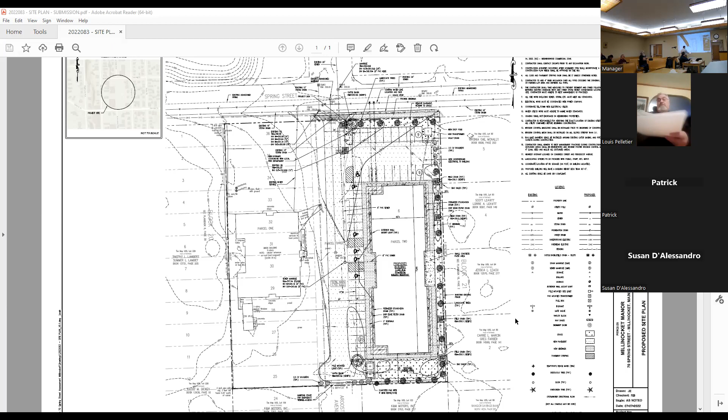We've located the dumpsters in the bottom here, as well as garden space for tenants to be able to grow their own vegetables or flowers. And then there's this additional green space here that we may carve out from the brick building, so that it's more of a lawn space for both properties.

So I think that's the extent of my quick overview of the project, but I know many of you have seen this the second or third time, so I don't want to belabor the point, and I'm happy to answer questions or hear from the public.

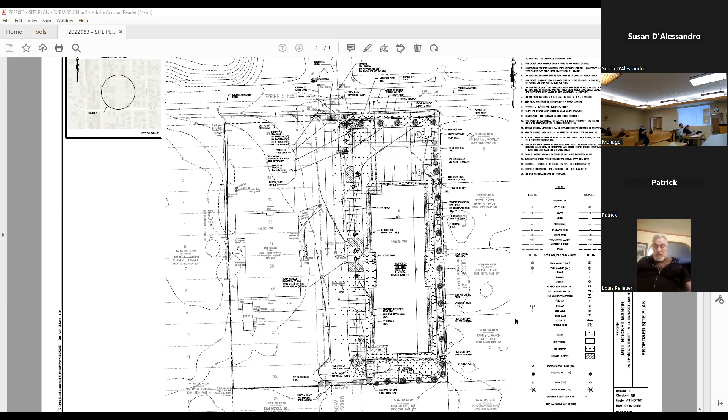Point of clarification: we have an alternate present. If there wasn't a full 7 members, he would continue, since Michelle is here. Mike is present and will not be voting. So we already voted on something. She wasn't here when we did that. Okay, George. Point of order. He can't vote, but he can still have impact and comments. Thank you, I don't want to keep going back and forth on this. Alternate members are expected to attend meetings even though they aren't able to vote necessarily unless there's an absence. Because if they just come in cold, they're not very productive if they don't know what's occurring. So he's present, and hopefully there'll be another alternate someday. All right, thank you. I can't see well at this distance, if I can jump in, but I know I sent you

Correspondence about the parking arrangements. At some point, I would like something from Penquis dealing with the single parking space per apartment. It's mentioned in the document that it's one parking place per apartment. However, I wanted it stated that there'll be one renter per parking place, so that there isn't an issue going forward that we have difficulty accommodating the number of cars. Yes, we can certainly accommodate that.

We do that actually in the lease. So the tenant will sign a lease that says you're allowed one parking space. I can provide a copy of a draft lease that would be helpful. And knowing that may change down the road if state law changes with other aspects of the agreement, but the parking designation section wouldn't, if that's helpful. Otherwise, I'm not sure what other mechanism or documentation we could provide other than it being a condition of site plan approval.

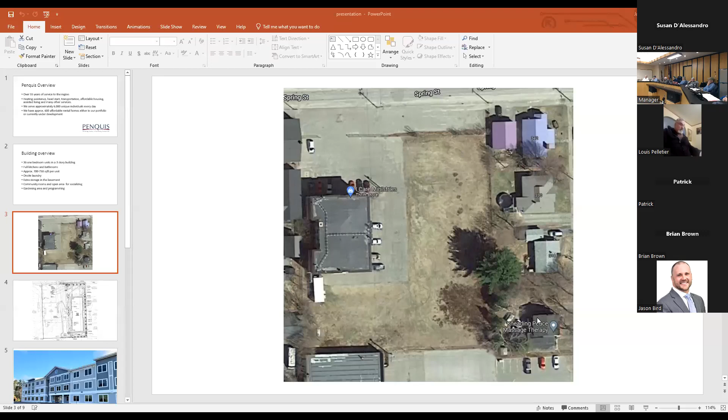Hold on one second, sorry, let me do just another quick screen share because I have a Google Earth image that can lend some context. So here is the brick building, and there are 1, 2, 3, 4, 5, 6, 7, 8, 9 or so spaces just around the existing building. But the lot line goes out to somewhere out here. So I think we have more than enough space currently paved to address not only the need for what may happen in the building, but also the spillover or other space for the new proposed building.

All right, I think we're both on the same page on this, in the sense of making sure we're not painting ourselves into a problem going forward. All right, thank you.

Any other questions?

I'm wondering, sorry I was late, it was unavoidable. But I'm wondering if you've been out to see the neighbors' property or address their concerns about their properties.

So we did, a staff person went door to door to drop off some information. I have attempted to call the numbers we knew or could find online, but in particular I have had a number of email exchanges with Mr. Leavitt, who is one of the abutters. But he is the only abutter that I've had a conversation with.

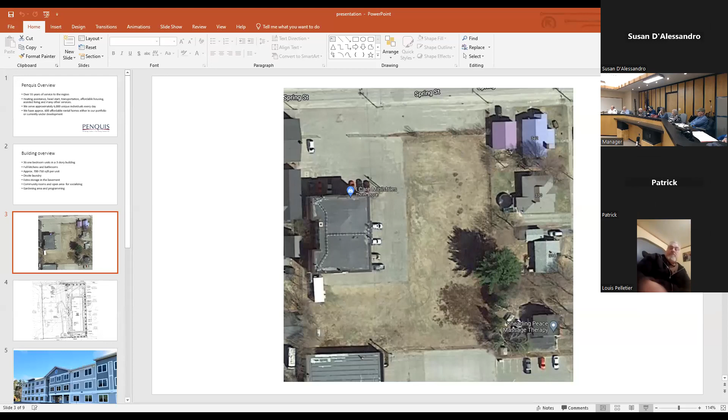My concern during construction is for my grandchild who's going to the dance studio. At the present location, there's a dance school where cars are coming and going during certain hours. Now, on the site of the new building, on the Spring Street side, there's currently a number of parking spaces that are utilized daily when school is in session. I'm wondering where those cars are gonna go during construction, but also when I look at the site plan, that Spring Street side is gonna be eliminated, utilized in a different manner, so those parking spaces are gonna be completely gone from the public. I'm just wondering if you can take that into consideration.

Sure, so the parking spaces that are there, because the lot line somewhat mirrored this curve, this curving right here. I can say that where we would be, the parking spaces that are on our property, those would be gone, because we're gonna bring the curb or the property line up, and we'll have our curb cut there. In terms of public spaces that may be along that street, I'm not certain.

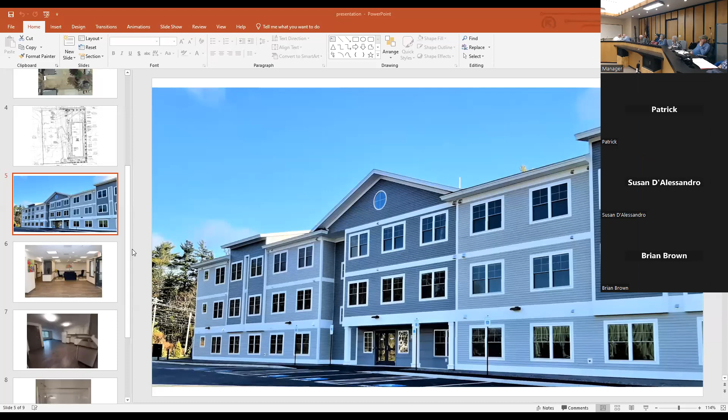Okay, I didn't want to step on toes and answer, so I wasn't sure. Hi there, so I'm going to share my screen, hopefully you can see that. I'll share the facade of a building we've built before. Can you see that now at home? Yes. Fantastic. So this building that we're proposing is nearly identical to what you see on the screen here.

While the colors may change — you'd be surprised that the cost of blue tomorrow could be 30% more than teal, so I can't say it will have the same color palette — the trim and architectural features, the offsets and things that break up the facade, will be the same or very similar, except for the roof. The roof you see here is a pitched roof that, if built, would be out of compliance with the most recent 40-foot height restriction for the zone. So we will be going to a flat roof for this proposed building.

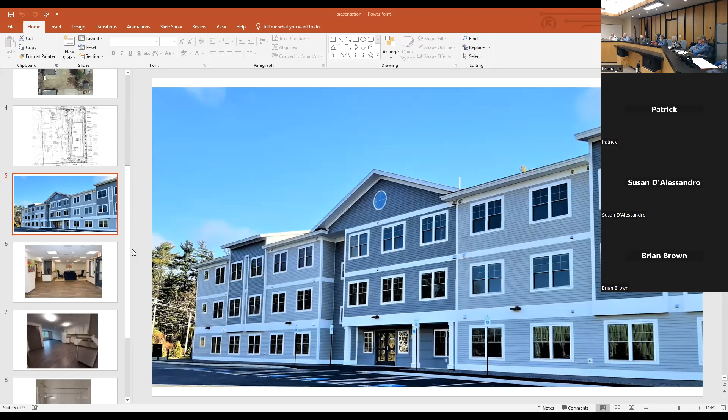We will have some sort of, I don't know if cornice is the right word, but enlarged trim around the roof itself to provide a little bit more of an architectural feature, but also actually a safety feature for when crew and what have you are on the roof itself.

And then to your question about the use of the brick building, while I deal with all of my organization's real estate holdings and work, unless someone in our organization wants to arm wrestle me, my main focus is to have that property be residential in nature, and have it be a sort of mixed use property. I think the business on the ground floor or basement floor provides a great service, and we wouldn't want to disrupt that. The two upper floors are woefully underutilized, and we see it as an opportunity for us to redevelop and go further in terms of meeting the housing needs for the community.

But in terms of timing, I don't know yet. Our plans would certainly be to likely, I would hope, finish that work probably somewhat concurrently with this building. The new building will take unfortunately something like 16 to 18 months to construct, probably running through still some of the backlog of delays, materials and other issues. So it's possible we'll start construction in the spring, if all goes to plan. And then that ensuing 16 to 18 months will be more than enough time for us to get into the brick building and have that renovated, assuming we get site plan approval for that as well.

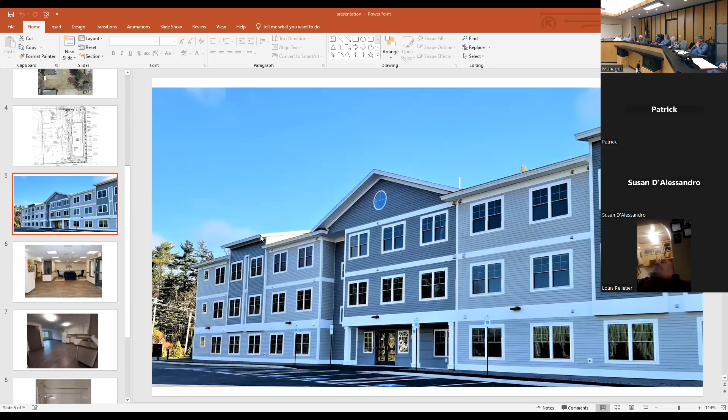Can I ask one question? You mentioned something about the right of way that bisects this property. Is there any restrictions on that section, or is that essentially non-existent? There is no right of way on this property. I believe that street has been turned over to both parcels, and in this case, one parcel. But there are restrictions on the sewer line that exits that building, so when it's split, there'll have to be an easement that basically runs up the middle of the parking. There is an existing catch basin or manhole about here that catches the sewer, and then it runs north to Spring Street.

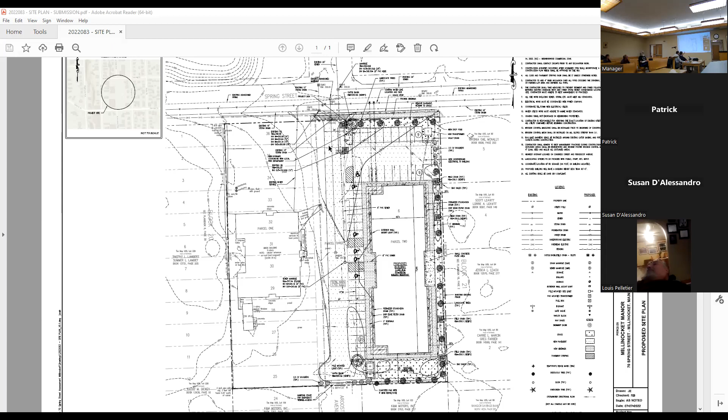Is that sewer or storm drain? We're told it's sewer, but when we opened it, it was powder dry, so we didn't trust it, so we designed a new one to make sure we don't—make sure we do the right thing. So we met with Public Works out there. They told us what to aim for, and that's what we're aiming for.

Quite frankly, that'd be very easy for us. All right, thank you. Mike, did you want to?

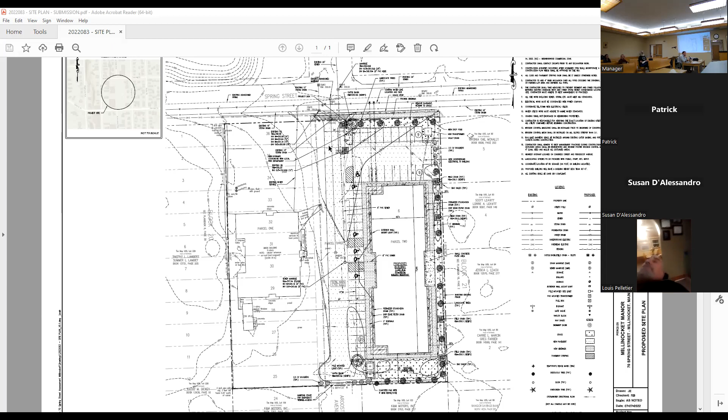I've been in construction, industrial construction, my whole life. I was a superintendent at Cianbro for 10 years.

I helped build the Central Street Bridge. During that year we did that bridge, the north abutment ended up settling like 14 inches on one side, 8 inches on the other. So we ended up demoing it all out, putting all new concrete in. Before we did, we had to drive pile to refusal.

This whole area was core tested by the Army Corps of Engineers and DOT. I've been researching this and trying to get the answers for us and for you guys, mostly for you, Randy, because it could become a huge issue for you.

That ground where we were was like 12 feet of coal ash and miscellaneous mill waste and other stuff that they just dumped in there. When we put the H pile in there for that bridge abutment, we had to go 60 and 80 feet to refusal, to bedrock.

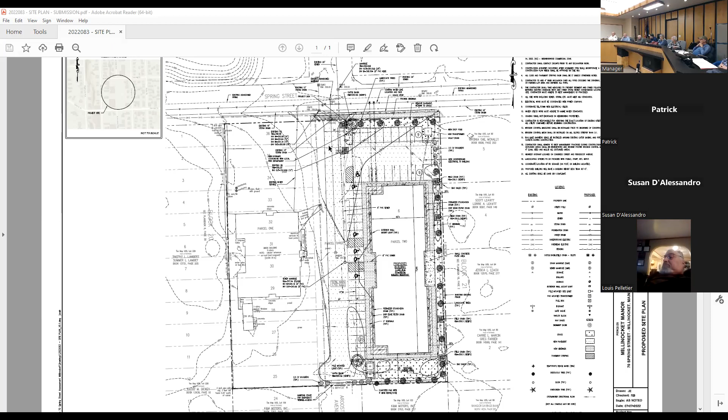But we do want to tell Jason what the damage is up front so he can prepare. I'm going to assume it's good fill, so if anyone wants to put out free fill wanted signs, that'll save us on trucking and getting all of it out.

Can I ask if there's no more questions from the planning board members? I'd like to get the public that are present involved, in addition to the ones on Zoom. We've already had one individual speak and others are here. If that's workable—this is a public hearing—people who wish to speak, come up to the microphone, state your name and your address, please, and we'll try not to go too far on time, but let's see what works out.

Scott Levitt, 330 Common Street, resident of Millinocket. I know where you're coming from, but my question is, is this going to be an answer to question Mr. Bird, and then give you what we're thinking of? Because I'd like to ask him a couple of questions.

Is that allowed? I would say so, as long as it's oriented towards getting the project discussed, and not getting into other issues. After everybody's spoken, ask Mr. Bird—there's going to be another platform for me to come up and express mine.